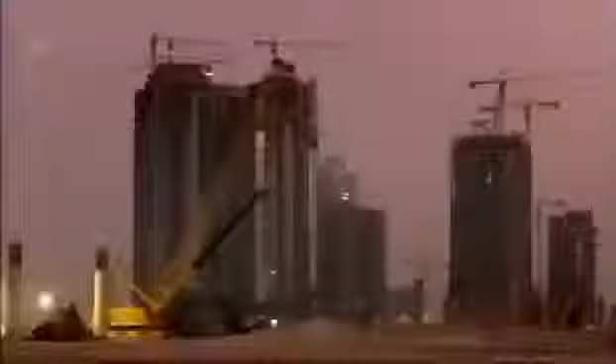Abu Dhabi, the richest city on the planet. It wants to join the City Super League and is undertaking an incredible transformation, building this extraordinary skyscraper, Aldar HQ. Nothing like it has ever been attempted. It'll be a race against the clock. Will this megastructure push even Abu Dhabi to the limit?

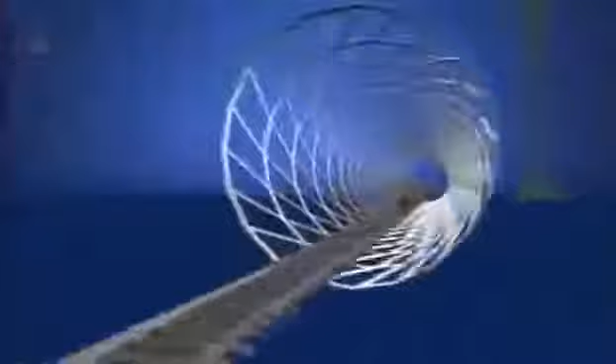Abu Dhabi is in the midst of a construction boom. It's the largest of 7 sheikdoms known as the United Arab Emirates. Its capital, also called Abu Dhabi, is the richest city on earth. Its ruler, Sheikh Khalifa, has a cool $875 billion in the bank and an audacious spending strategy to match. He wants to transform the skyline and compete with the international elite of London, New York, and Hong Kong.

But this is not the first time the Emirate has stood at the crossroads. Just decades ago, Abu Dhabi was a desert backwater, until the discovery of oil in 1958 brought unimaginable riches to its ruler, Sheikh Zayed. As the petrodollars flowed in, he converted the shell houses into high-rise, and the traditional way of life was swept away.

Today, Abu Dhabi is a thriving metropolis, sitting atop the world's 5th largest oil reserve. But black gold alone cannot put this city in the Super League. To do that, Sheikh Khalifa must lure big business and tourist dollars. Abu Dhabi must expand to thrive.

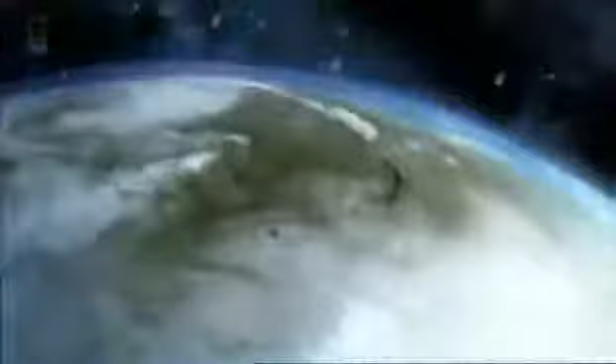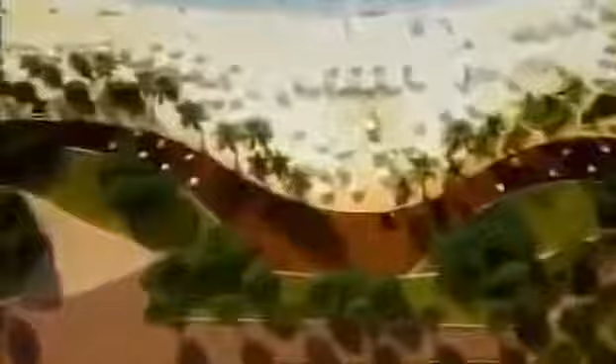To put Abu Dhabi on the world map, fledgling property developers Aldar plan a whole new micro-city, Al Raha Beach. It's an ambitious proposal. At 11 kilometers long and almost a kilometer wide, this city on the sea will be the biggest project ever attempted in Abu Dhabi's history. Mohammed Al Mubarak is in charge of delivering this audacious development. The vision of their highnesses and the vision of Aldar was to create this almost mini city where people can live, study, play, and work in one destination.

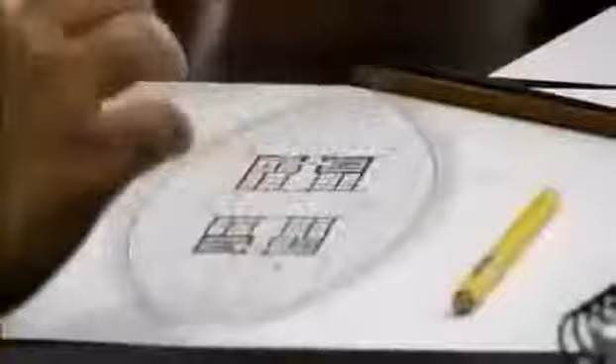Al Mubarak must attract investors if Al Raha Beach is to succeed. So to launch the project, he commissions a signature skyscraper. Creating an iconic structure on Al Raha Beach was of vast importance in basically putting Al Raha Beach on the world map. Al Mubarak sets Lebanese architect Marwan Zgheib the task of designing an icon that raises the stakes even higher. The building will become Aldar's headquarters in the heart of their colossal development.

But creating something new in a land where the iconic is the everyday won't be easy. Neighboring Emirate Dubai has taken center stage with a number of headline-hitting projects: the world's tallest skyscraper, Burj Khalifa, the Palm, and the World, and the emblematic Burj Al Arab. To stand out from the crowd, Zgheib knows he must redefine the extraordinary. Simple can be powerful sometimes, and especially in architecture. You can see it since the pyramids of Egypt. Most of the iconic buildings are very simple buildings.

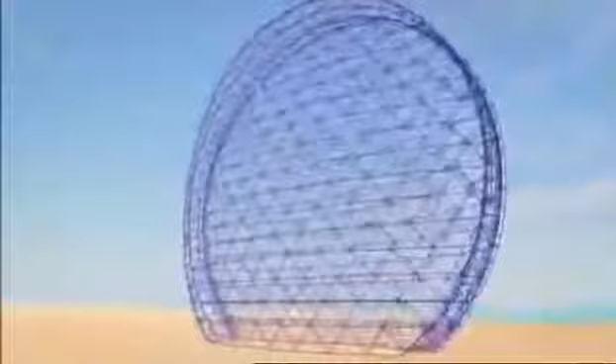But it isn't until Zgheib is relaxing on a plane that he has a brainwave. I couldn't sleep, so it was a moment of relaxation, you know. And then the idea came simply. So I took a pen and I drew it on a sketchbook. The design is simple but daring. A round skyscraper taller than the Statue of Liberty, with a curved glass skin covering the area of 4 football fields. To be honest with you, the moment I imagined it, I knew it was a winning concept. I knew it was something different.

In fact, the design is so unusual, Al Mubarak initially doesn't know how to react. When I first looked at the MZ design, I was a bit confused in the beginning, to be honest with you. I felt like I was looking at a comic. I felt that this was a flying saucer and basically it landed on Al Raha Beach. And I just kept on staring at it for like another 15 minutes. And after 15 minutes, I just fell in love with it.

Zgheib's design is inspired by nature. 2 giant circular curved walls of glass mirror an open clamshell. Architecture is nothing but imitation of nature. At the beginning, the idea was so geometrical, very pure. It's like a seashell. The seashell has deep meaning for Abu Dhabi with its seafaring heritage.

But a circular design poses a problem. Just like a coin that stands on its edge, it risks being unstable. The circle must be balanced. So Zgheib turns to some very old-school geometry. The real challenge of the circular facade was to find the 2 points where the building should pose on the ground. And for that, I had to go back to one of the oldest rules in architecture, proportion. When you have a circle, you can divide it into a pentagram.

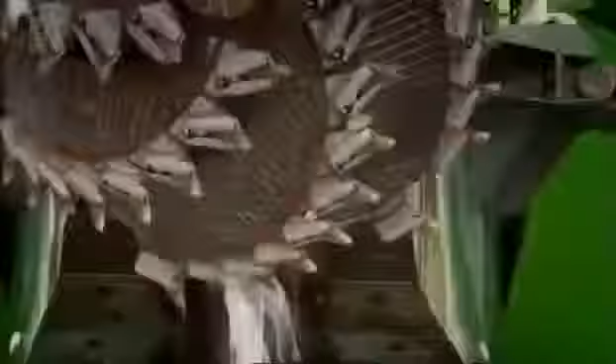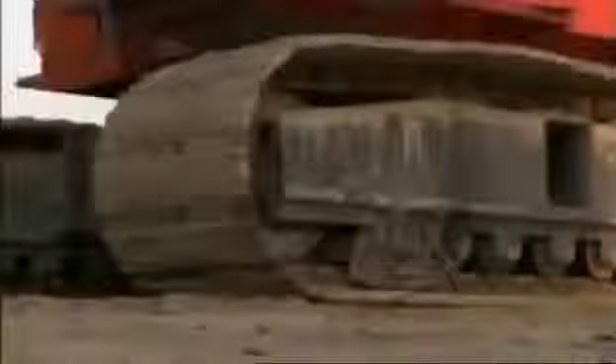A fleet of cutter dredgers eat their way into the island. These are no ordinary dredgers. It takes an enormous claw layered with 48 reinforced steel teeth to slice through the hardened sand. The sand is pumped through a floating pipe to the construction site. Here, excavators toil 24 hours a day to flatten the virgin ground. After 8 months, the land for Aldar HQ is fully formed, and with this, the first major problem overcome.

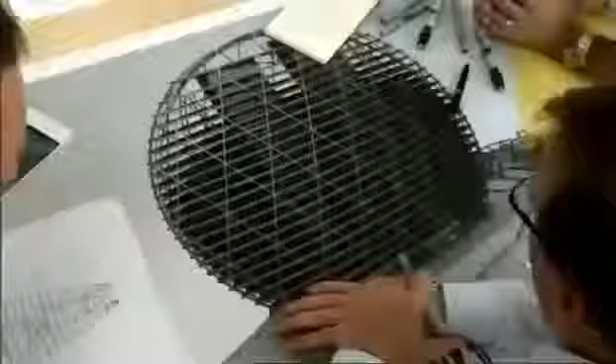Aldar want their skyscraper completed by an astonishing deadline. In just 30 months' time, the eyes of the world will be on Abu Dhabi when it hosts its first Formula One Grand Prix. The racetrack will be on its own designated island, complete with hotels and theme parks. And Aldar are building the lot. The international press and tens of thousands of visitors will descend on the city. It's the ideal opportunity for Aldar to showcase their new HQ. But to stand any chance of meeting this target, the team will have to pull out all the stops.

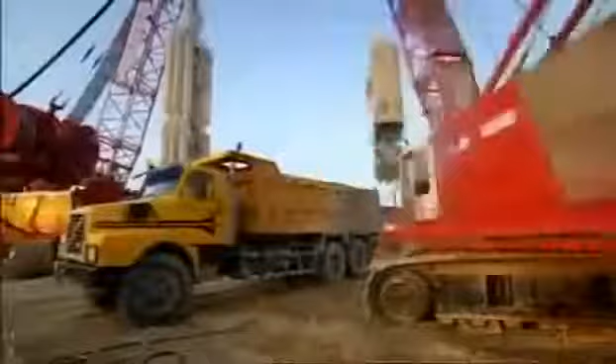Just one month after design has started on Abu Dhabi's round skyscraper, the construction team arrive on site to begin foundation works. For construction manager Miles O'Sullivan, the schedule is a shock. With the design not complete and being told you're going to pile in one month, almost crazy. But it's not just the first deadline O'Sullivan has to worry about. Aldar HQ's round curved shape presents an enormous sail-like area when wind strikes. Wind tunnel tests must be done to prove the foundations can take the strain. But the results won't be back until work has already started.

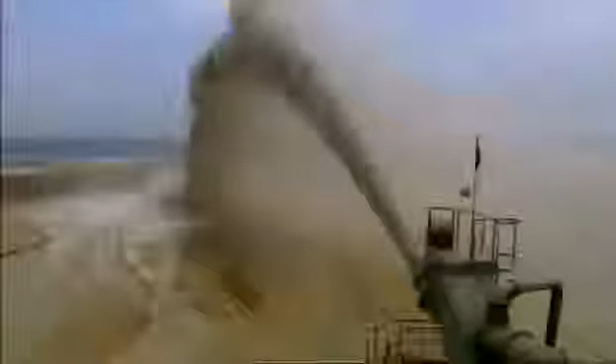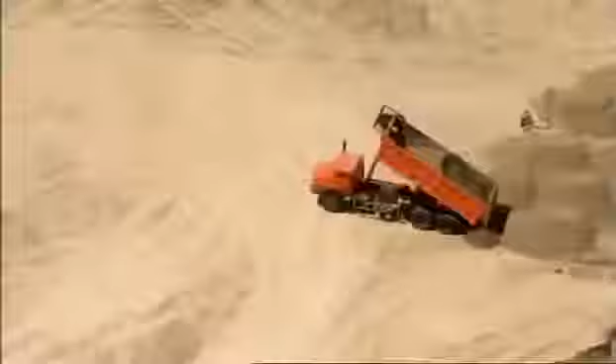Abu Dhabi is regularly hit by high-pressure winds that sweep in from the Persian Gulf. But building Aldar HQ so close to the sea will put the foundations under another kind of pressure. Digging for Aldar HQ is very similar to digging here in the sand. As you dig down, you'll get to see the groundwater starting to surge through the sand. And in fact, it's that groundwater coming through the sand here that's creating the pressure and creating the issues for us when we do the construction. The upward pressure of the water and the loose sand pose a problem for foundation construction.

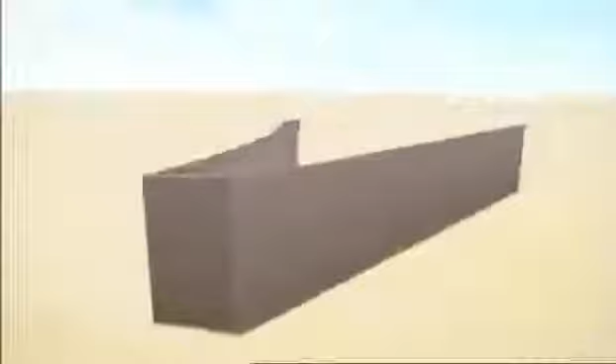Before excavation can begin, the team must build a solid barrier called a diaphragm wall or D-wall. It's a concrete barricade formed of interlocking panels which socket into the bedrock and reach 16 meters below the surface. The D-wall holds back the loose sand and the surging seawater, ensuring the ground inside the barrier can be removed. These areas here, what are these? The D-wall must be built before the foundations can be laid. But with the blueprint above ground a work in progress, the team can only hope that over-engineering the foundations will make them strong enough.

The design calls for about 400 concrete piles that work in two ways. Half of the piles rely on friction with the ground to secure the structure to the rock and sand below, whilst the remaining piles drive deeper into the rock to dissipate the building's immense loads into the ground. On site, D-wall construction begins. It's the same process ongoing at this Abu Dhabi construction site.

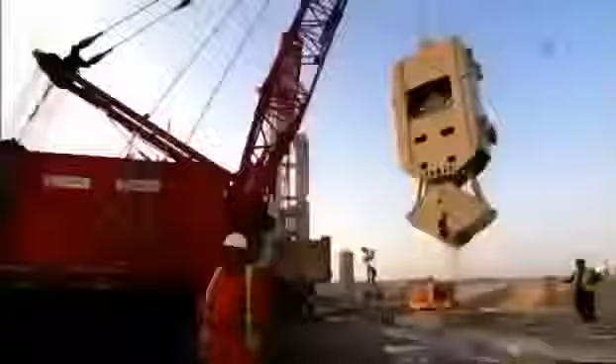Until recently, Al Raha Beach was just a vision for Aldar's Mohammed Al Mubarak, but the dream is slowly emerging from the sea. Seeing that land come up, seeing the amount of work and the amount of staff we had on the ground to make sure that was going to be done, that was like watching Rome being built.

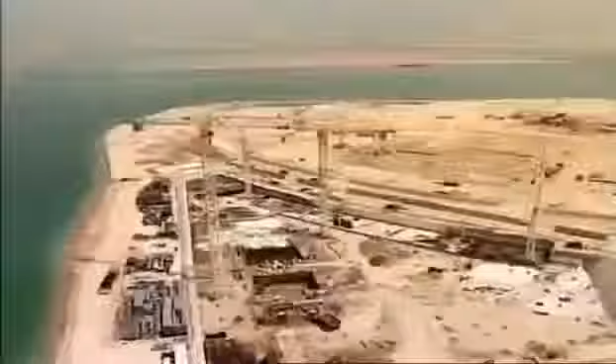The D-wall and concrete piles create a firm foundation upon which to build Aldar HQ. But the force of the sea pushing up through the sand still poses a threat to the skyscraper. A great way of demonstrating the problems we faced at Aldar HQ with the groundwater is imagining that this bottle here is Aldar HQ. And as I push the bottle down, you'll see forces are exerted on my hand. And in fact, that's the groundwater trying to push the building out, trying to push Aldar HQ out of the building site.

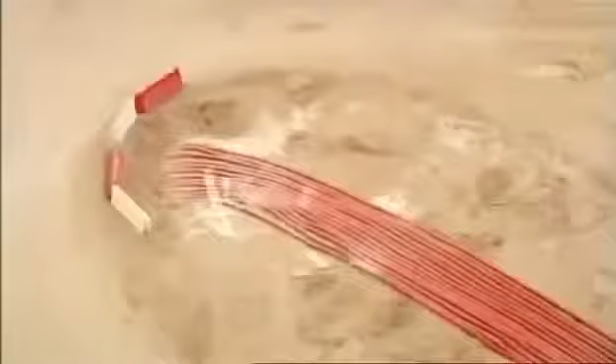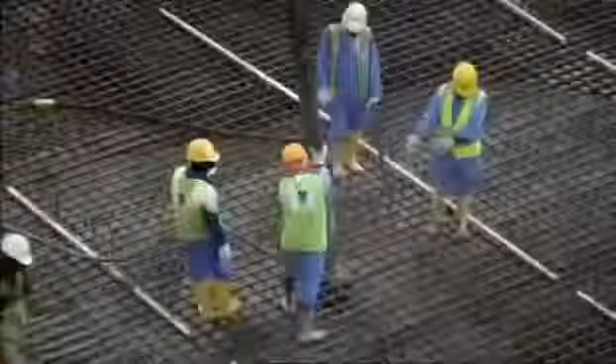To keep the site dry during construction, water is sucked out of the sand and pumped out to sea. But that's only a short-term solution. To protect this skyscraper in the long term, the team need an extra defense. It's a giant slab of concrete called a raft. It creates a barrier against surging water, stops the piles from punching up through the building, and acts like a snowshoe to evenly distribute Aldar HQ's 59,000-ton weight into the ground.

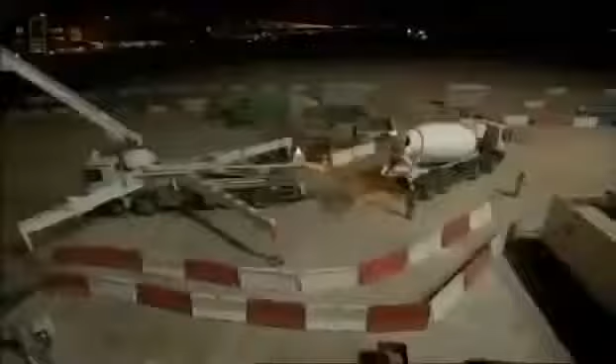Raft construction for Aldar HQ is 12,000 cubic metres of concrete, which is a 30,000-ton structure. It's a huge element. With 2,000 truckloads of concrete to pour, it's a job that continues into the night. But engineers are just getting to grips with the severe forces that will affect the piles. The unique shape of the skyscraper will capture wind like the sail of a yacht. There are no guarantees the foundations will be strong enough to cope with the loads.

The advanced construction works had to commence so quickly that we didn't have time to do the wind tunnel test. It was important that we did one, primarily because this is a unique shaped building. Gibbons calls upon wind engineer Roy Denoon in Colorado, USA. He puts a scale model of the HQ through its paces in his high-tech wind tunnel. Right at the start, Craig Gibbons actually called me and said, "We've got something really unusual coming up. Can you take a look at it and give us your first best guess of what the wind loads might be? Give us some guidance on how to get to some loads for the foundations, because this is running on such a fast-track schedule." Knowing that Gibbons is already building the foundations, Denoon wastes no time in firing up the fans.

If the tests reveal the wind loads are higher than predicted, the foundations already in the ground may have to be redesigned. To be putting in the foundations before we could finish the wind tunnel testing, that always gives us a little bit of cause for concern. Denoon is right to be worried. He knows how high-altitude wind impacts on very tall rectangular skyscrapers. But Aldar HQ's lower height means another type of wind is the threat. When we look at the really extreme wind speeds in the Middle East and in this region, we find that the highest, what we call gust wind speeds, the short events, are caused by thunderstorms.

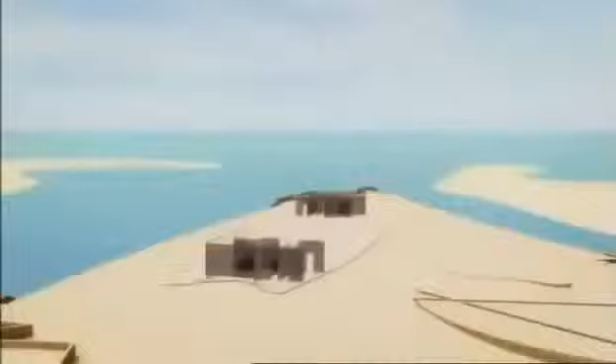Aldar HQ needs two concrete cores for extra stability. The twin spines rise a full 125 meters from the concrete slab to level 23. Reinforced with 6,500 tons of steel, these cores will transfer the loads into the piles. But to channel these forces safely, the concrete must be cast without any flaws.

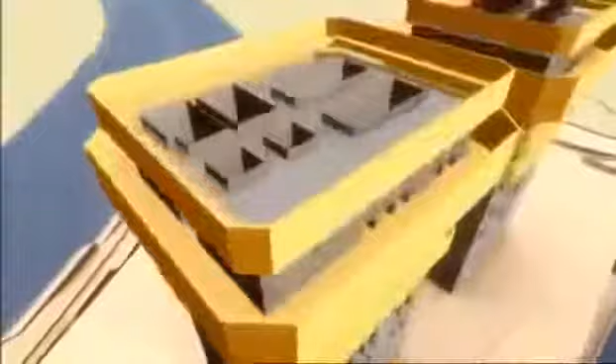They need a way to build the cores as two single pieces of concrete. The answer? To slip form. It's a clever way to build big concrete towers. Liquid concrete is poured into a giant mold, which forms the shape of the structure. The mold slowly climbs up the core as it's cast, forming a single concrete tower without any joins.

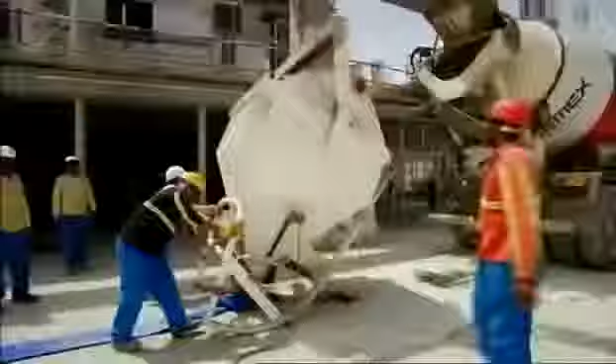Seamless concrete will ensure the HQ's cores are strong. But these 125-meter backbones must be built in only 6 months. It's the same process ongoing at this Dubai construction site, led by the Aldar HQ team. We are calculating how much per hour we need to climb, and then how much concrete we need to place in every hour. Slip form is fast, but on this schedule it's not fast enough.

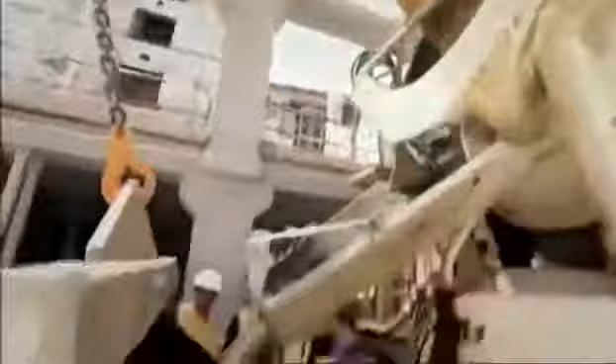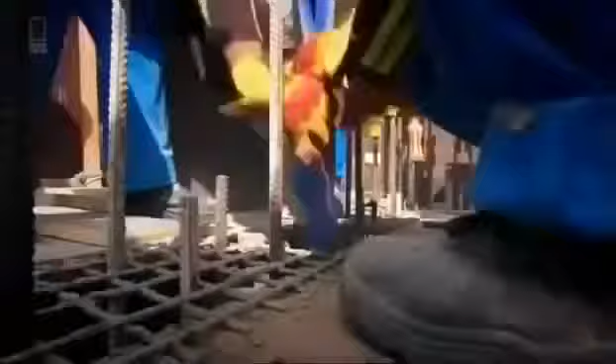O'Sullivan has a trick up his sleeve to speed up construction. We set a challenge to both cores, who could get up there first. More. Get up. The teams battle to reach each level before the other. The cores grow meter by meter under a constant cycle. The concrete is released and poured around the steel reinforcement. Hydraulics anchored to the structure raise the mold or shutter so that the next layer of concrete can be poured.

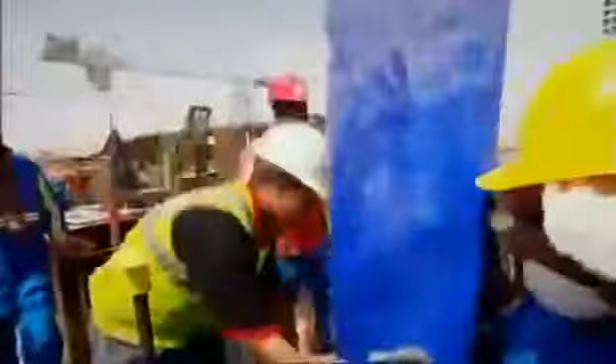Manpower is a key focus because slip forms are very labour intensive. You need to make sure that the guys are on deck, they're there at the right time, they're doing the right works. 4 months into core construction, the two teams are neck and neck in the race to the top.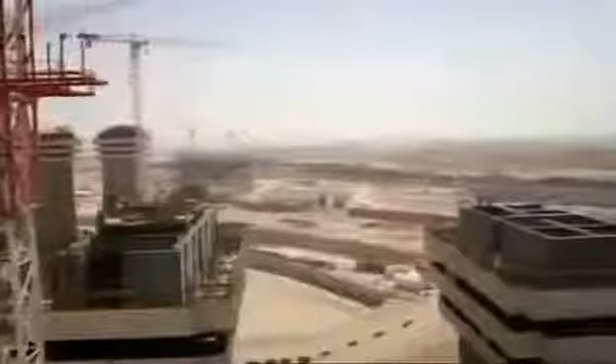Core 1's team leader keeps a close eye on Core 2's height. It's been my benchmark, so if I'm doing better, I'll be ahead of them. A lot of pressures are there. My boss is telling me, do this, go up, go up, go up. But it's good, the pressure is good. Core 2's leader also feels the strain. I'm working 24 hours today. I try to finish earlier than the other core.

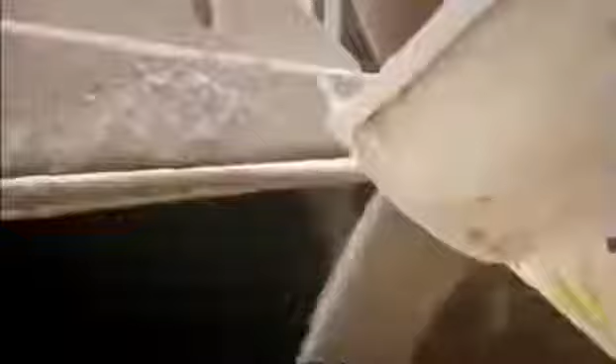Every month, the builders pour enough concrete to fill 1.5 Olympic swimming pools. But the teams aren't home and dry yet. There's still a challenge to finishing. Cores are renowned for going up quickly and sometimes having problems, so there's a lot of coordination effort that goes in to make sure that they do go up on time. We had structural steel elements to cast in. We had crane connections to get right.

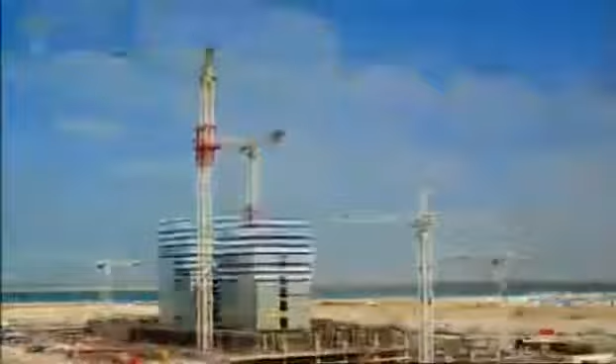After just 6 months, the two cores are approaching the top. Core 2 is only a meter or so behind, but Core 1 push ahead to victory. Core 1 won the race. It's really good to know that we're on top. For O'Sullivan, the contest to build the cores in record time has paid off. A lot of planning goes into the cores. To see it come off, a fantastic feeling. But it's only a stepping stone, the core construction. There's a lot more to go on.

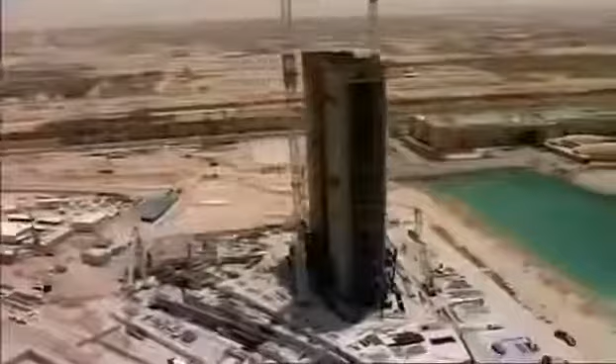The team have so far overcome the obstacles to bring Aldar HQ to life. But now they must face their most complex challenge to date. 1 year in, and Abu Dhabi's radical skyscraper is beginning to take shape. But with only 19 months to the deadline, the engineers must crack how to build Aldar HQ's vast external shell.

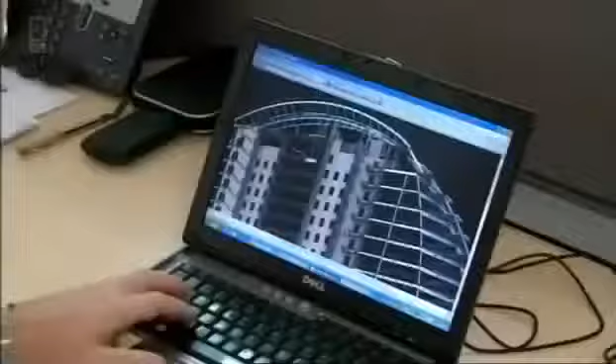The design demands a heavyweight shell to support its wide girth and survive huge wind loads. But the architect stipulates open office space, floor-to-ceiling windows, and panoramic views of the Persian Gulf. In the United Arab Emirates, the shells of rectangular skyscrapers are built with concrete. But the geometry of Aldar HQ's shell is so complex, it must be built with the precision of a Swiss watch to fit together. On this scale, achieving millimeter accuracy with concrete is practically impossible.

We knew at the outset a wholly concrete building was never going to work in this instance. And Stuart, I understand that now we've been able to get a high degree of repetition through. And there we go. The engineers need another solution.

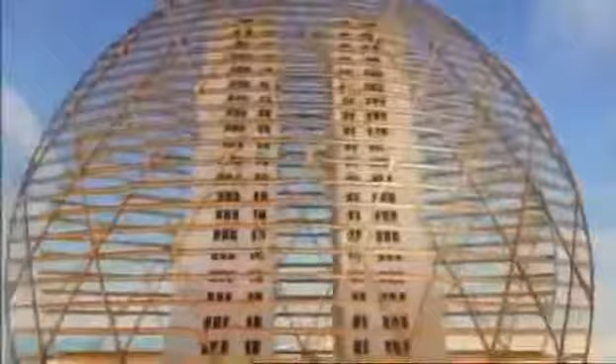The answer? A specialized steel exoskeleton called a diagrid. It's a muscular but slender steel frame that will form the HQ's unique shape and will channel forces through its high-strength beams and joints into the cores. Steel is very strong as a single element, but meshing them all together gives us this added strength and also allows us to make these rather unusual shapes.

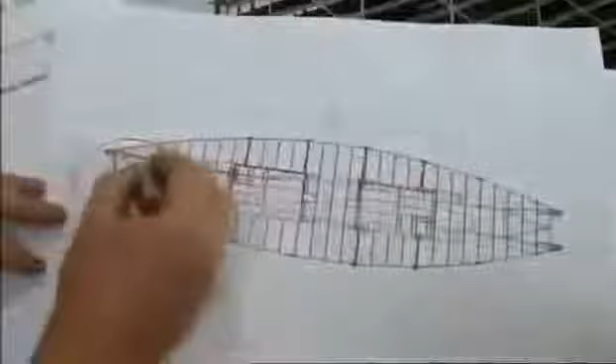The steel exoskeleton should make the architect's vision possible, but it'll be a first for the United Arab Emirates. Constructing a skyscraper like this will be a step into the unknown. The geometry of the building presented a significant challenge to us, but the other challenge was that a diagrid building, or buildings using this diagrid system, had never been built before in Abu Dhabi and the UAE. Let's have a look at it if you don't mind.

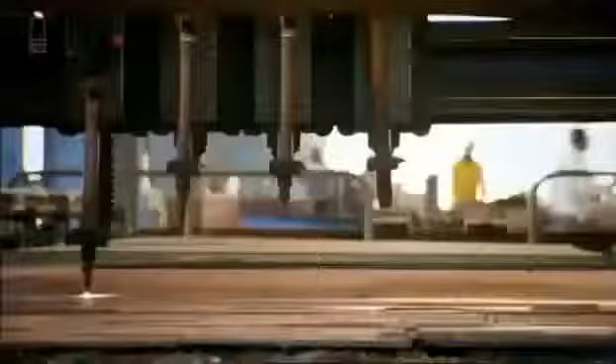It'll take expert steel fabricators to pull this job off. When we first saw the design, it was something that we knew we had to put our most experienced guys on. The structure's very, very complex. The army of fabricators work in shifts around the clock to cut and weld 2,500 tons of steel. The factory is building a series of A-shaped steel sections, weighing up to 30 tons each. They will connect together to form the structure's signature curves.

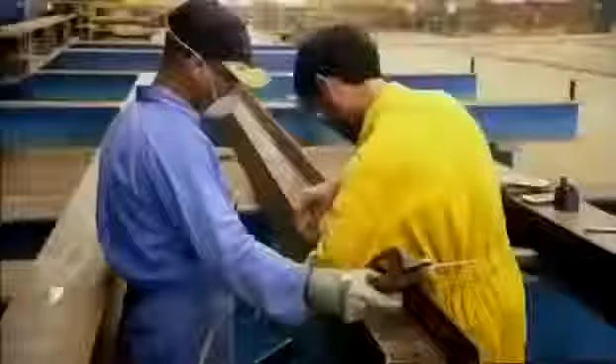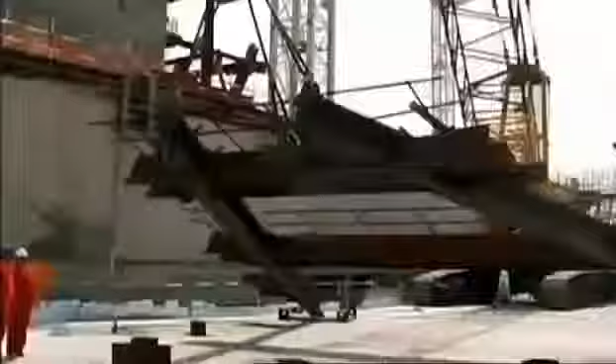But if manufacturing these giant A-frames is not a big enough job, lifting them into position on site will be a major challenge. Great to see the steel arrive for the main diagrids, the main columns to the structure. Huge sections. The thought of actually starting the steelwork some 18 months after we started the job, fantastic. But excitement of the first A-frame delivery is soon replaced with trepidation. Lifting these monsters will be a precision job, and tensions run high.

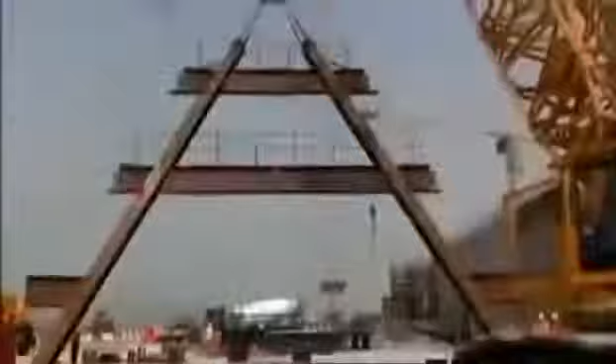When we rigged the first A-frame up, you've got to put all the chains on it. It would take maybe an hour to rig it up, and everybody's then thinking, I hope this is going to work. Everyone is on tenterhooks. Now is the moment of truth. The A-frame is lifted off the ground. There was a big ah from the crowd when it went in. The first exoskeleton section is finally bolted to the base plate. To see one go in, an amazing feeling. First A-frame up, again a milestone achieved, but then a lot more to go.

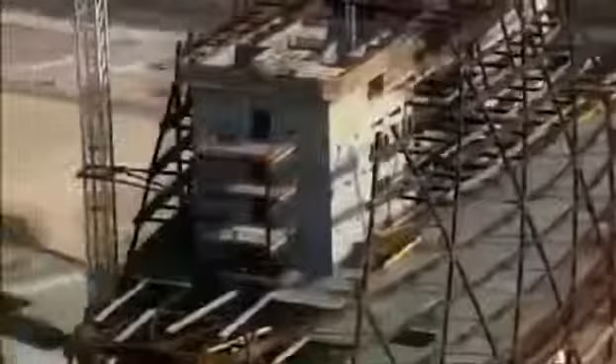Another 99 A-frames must be fitted to form Abu Dhabi's unique skyscraper. The handover date is now just 19 months away. So the team must now focus on the HQ's interior. The structure needs an alarming number of restrooms, 85 in total. This is no weekend DIY job. It'd take an army of plumbers and time the schedule cannot spare. So to fast-track the task, the team innovate again with prefabricated washroom modules, or pods.

A pod is a factory-made restroom, complete with lavatories, basins and mirrors, ready to plug into the building. The team plan to lift these 12-ton pods by crane and lower them into the cores like a giant game of Tetris. Construction is a finely tuned sequence. The pods have to be in before the exoskeleton blocks access to the cores.

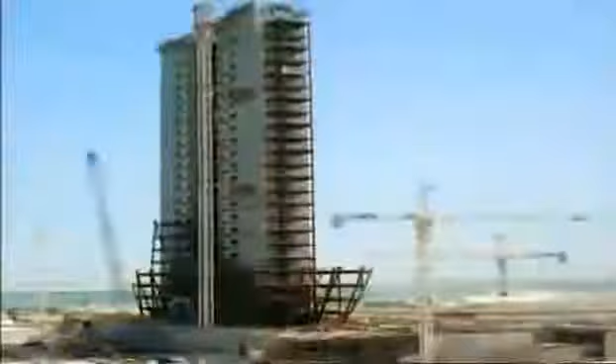Aldar must approve the design fast, but there's a problem. We produced a lot of visuals and graphics which we had signed off. Then we actually built the pod. We went to look at it at the factory and a lot of people thought that's it. But Aldar unexpectedly rejects the pod design. It's just too ordinary for such a futuristic skyscraper. It will take months to remodel, and the exoskeleton can't wait. The whole plan could go down the pan. The only option is to leave out 2 roof sections and drop in the pods later, but this has its own dangers.

With zero hour looming, the team must now wrap the building's skeleton with a glass skin. And no one has ever built a glass facade like it. The geometry of Aldar HQ is highly complex. 2 giant bowed facades cover an area the size of 52 basketball courts. A third narrow surface joins the round facades like a zipper, arcing an extreme 290 degrees from one side to the other. But curved glass like this doesn't exist. The engineers need another plan.

The secret to covering a curved surface with flat glass is its shape. Square glass isn't an option. Squares can only bend in one direction at a time without distorting. Aldar HQ needs triangles. They can pivot on 3 axes and seamlessly join with their neighbors. To form these complex curves, it'll take 25,000 individual panes.

But before glass production can begin, the team must know what wind pressures it will face. It's back to wind engineer Roy Denoon, who must test the design in his wind tunnel. When we first saw the design, we knew there was some potential for some quite high glass design pressures. If you under-design a pane of glass, then it will be sucked out the building. The large facades are most likely to cause trouble.

The biggest loads on the overall building are the winds coming flat into the wide face, so it's capturing it almost like a sail. The wind comes into the centre and spreads out around the building, and where it separates and splits away from the building around the edges, that's where we see the largest pressures. The pressure is like a big SUV hanging off the outside of each panel.

But that's not all Denoon's test reveals. The circular shape of Aldar HQ creates another problem. When we initially saw the design, the sharp edges threw up this warning flag that said, look, we can get some pretty large pressures here. Where the wind hits the edge of the narrow strip of glass, it spirals in on itself, creating a vortex.

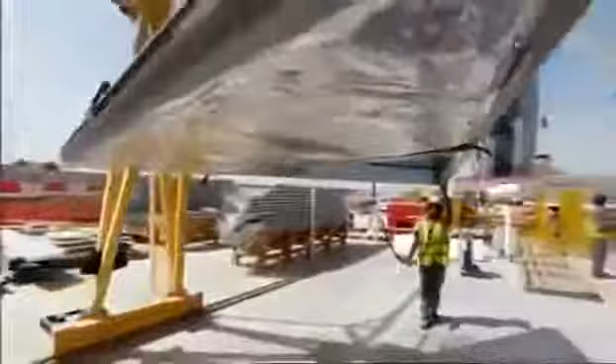But that does nothing to limit the scale of the job ahead: installation. You talk about 25,000 pieces of glass to do that for the building in 10 months. It's a monumental effort. It's a constant battle, making sure that you get the glass to site. But having the glass factory on site is a lifesaver. It made it easier for the site to actually call up on glass. Once they are installing the panel, they ran out of glass, we're immediately on the phone, hey, we need more panels over there. So we got them on a truck, and 5–10 minutes later they were on the site.

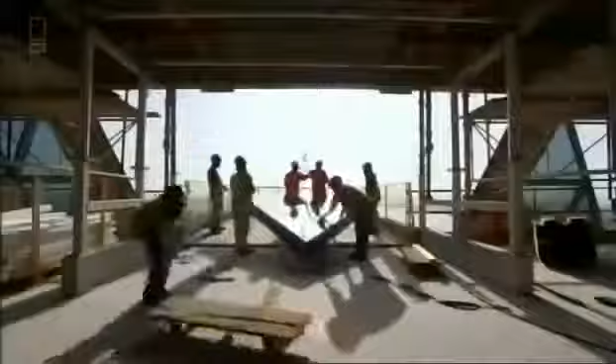The glass factory sends the panels to the site by truck, and the panels are lifted by crane up to the installation team. The constant pressure was the program. The glass is pulled onto the floor plate, but it takes a team of 8 specialist riggers to install the panels. Probably the hardest thing was the sheer volume that had to be installed. Fixing glass on a curve at this height means the panels have to be swung out from a platform that hangs out of the building.

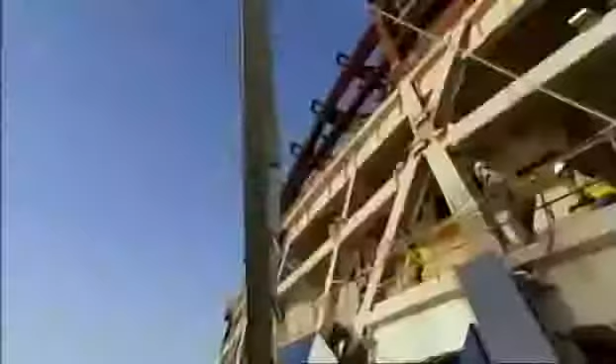It should be easy, but then this team have Abu Dhabi's wind to contend with. The wind here can just blow in from nowhere. It caused us no end of problems. The glass would start to revolve and spin. We would get a choice whether to lift it, bring it into the building, put it down, or to put it straight back down on the ground. They were decisions that had to be made on the spot. And you don't want a large panel coming down from 20 stories. Just contemplating that, it doesn't bear thinking about.

This glass panel makes it into position in one piece. But the team have another 29 to install every day if they're to meet their targets. We got it up to 30, 32 on average, and I think the best day was over 40. But as the line of glass fast approaches the top, the team must install the delayed washroom pods to close up the roof steel. You do 15 metres in one day, so you're 120 metres, yes.

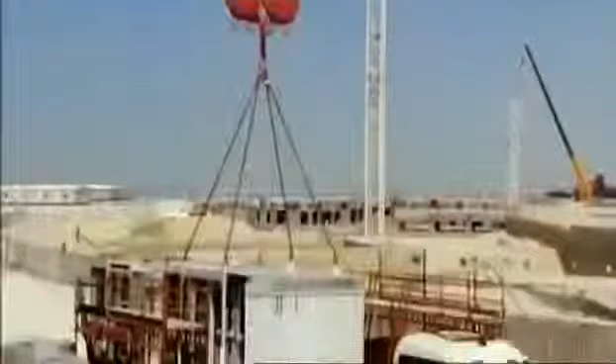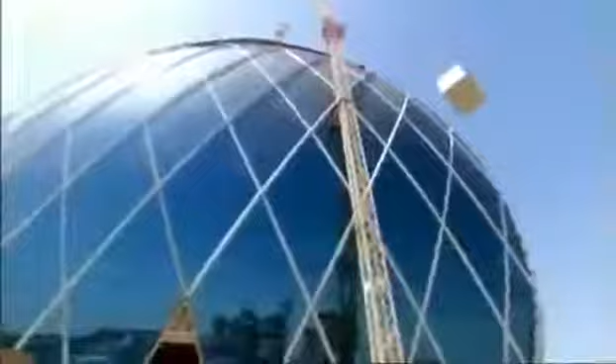The new design is finally approved, and after 10 months, the 12-ton modules start to turn up on site. The pod drops are quite quick. We hook them up, we take them up the 140 metres to the top of the tower crane. The pod can now be lowered into the core shaft. It's a tight fit with just 75 millimetres of clearance.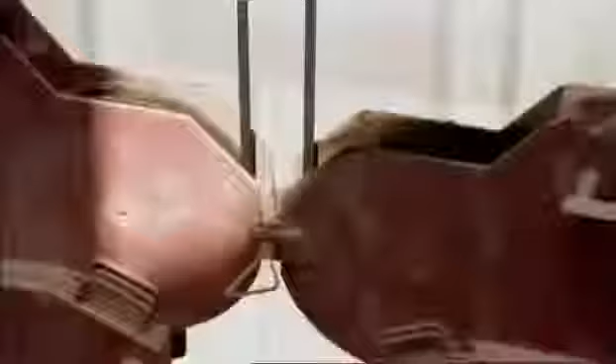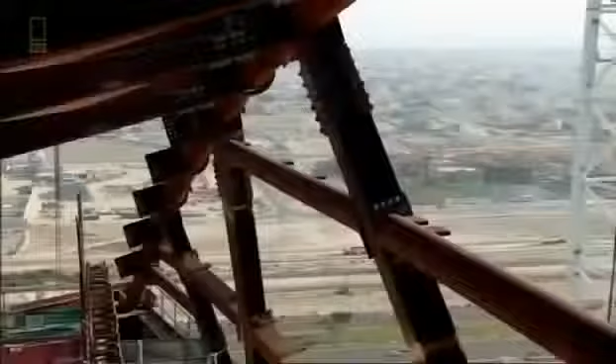When I saw the first pods in, it was a relief that that saga was over and we'd actually managed to achieve what the client wants. The pods are on the move, but the long delay has serious consequences. Finishing the exoskeleton should be a straightforward task. But the incomplete steel roof has sagged out of shape.

Eight months from the deadline, and the world's first spherical skyscraper is fast approaching completion. But with the end in sight, construction hits a serious snag. The delay in fitting the washrooms into the cores has forced the team to leave the roof arch open, causing the steel to slouch out of shape.

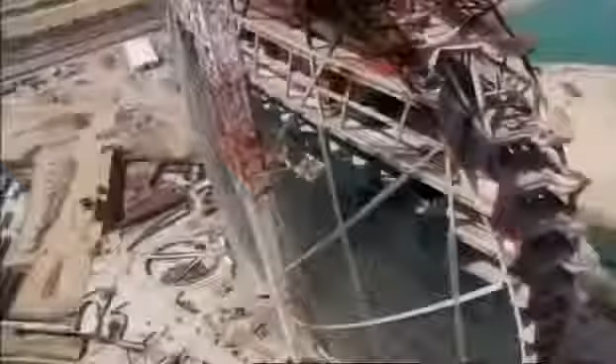The arch of the HQ's lightweight roof is the key to its strength. Its curves evenly distribute the forces down into the foundations. But if any elements of the arch are missing, the forces cannot flow away. The roof will sag under the weight. To discover how serious the slump is, the steel is surveyed.

I've made a phone call to our site supervisor, Bob, and asked the question of what the actual sag was recorded, expecting it to be around about 50–60 mil. When we got the figures of 150 millimetres, I was a little bit shocked. With a building that relies on precision engineering, a 150mm sag is a huge problem. The roof will not slot together. The brackets to connect the remaining 40 glass panels will be out of alignment.

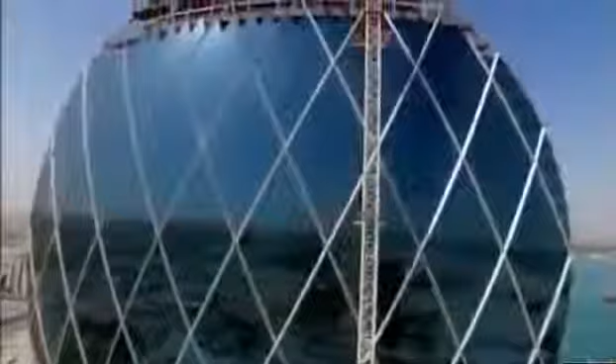There is no time to redesign. The team have to somehow make the roof steel fit together. The only way is to lift the entire roof into position, and it weighs a staggering 200 tons. Even for experienced steel engineer Bob McPhee, this is a serious undertaking. I hate it when you start waking up thinking about your work. I've never liked to do that.

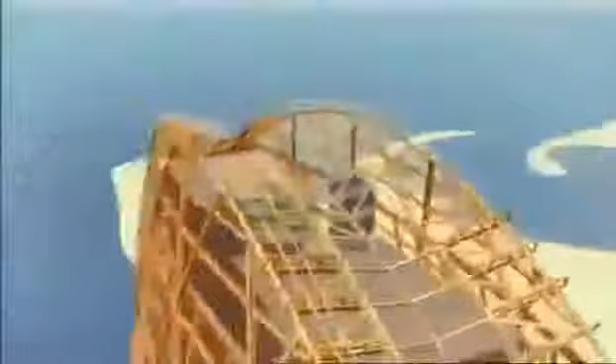To lift the roof arch, 2 hydraulic jacks are positioned on top of a load-bearing wall, carrying 80 tons of weight into the core. 2 more jacks are propped with 16-meter-tall steel columns and channel 40 tons each into the concrete floor of level 23. The props are packed with steel slabs to hold the roof in position as the jacks are raised.

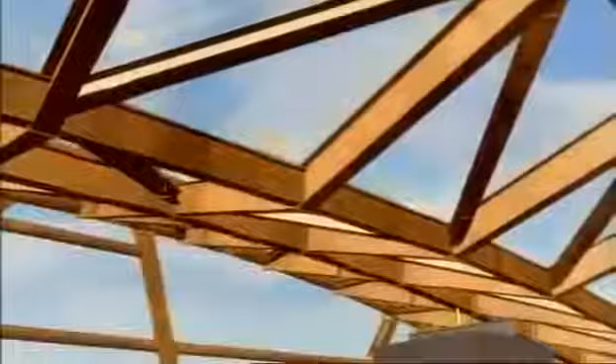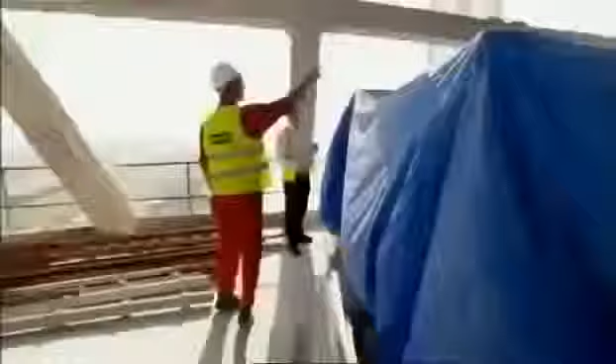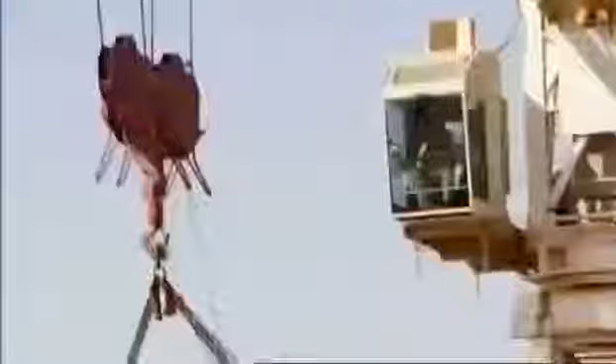The roof is moving firstly a couple of millimeters, then 5, then 10, then gradually into its position 20, 50, 100, and then into its final position 150 millimeters. The entire roof is raised by a whopping 150 millimeters. The slumped arch is finally in the right position. All that remains is to lift the last steel section. It's a tight fit. With a millimeter to spare, the roof is finally complete.

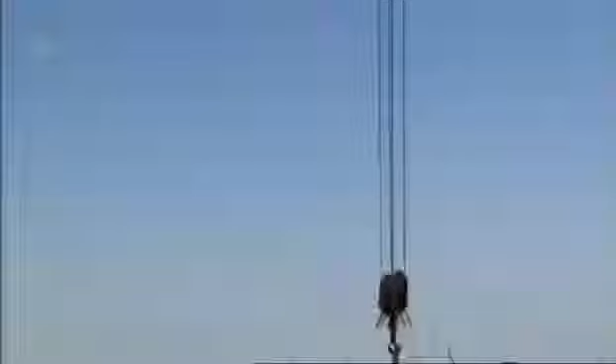With just weeks to spare before Abu Dhabi's first Formula One motor racing spectacle hits town, all of Aldar HQ's 25,000 glass triangles are in position, except one. The glass installation team lower the pane inch by inch. No one wants to be responsible for shattering the last sheet of glass. It's a defining moment for the team. Finally, the last pane slots into place.

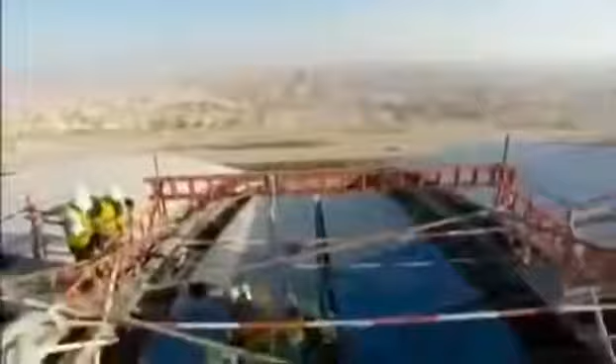Ecstatic. Actually see the last bit of glass go in. Amazing feeling. Hopefully the guys here feel the same way, and I'm just overjoyed. Against all the odds, and in just 30 months, the team have fulfilled their brief. An engineering triumph. This is Aldar HQ. This spherical skyscraper, a world first, rises 110 meters above the Abu Dhabi sands. All 25,000 glass panels mirror the surrounding landscape, reflecting the blue skies and the rolling sea of the Persian Gulf.

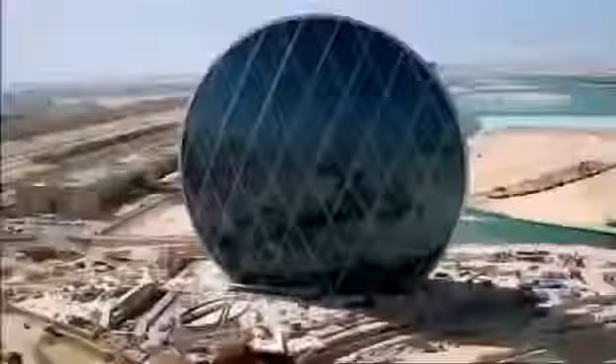Amazing structure. You don't see any circles in the world being constructed, so to be part of that was fantastic. Mindful of all the issues and challenges and highs and lows in between adds to that feeling of triumph. Mohammed Al-Mubarak fell in love with an extraordinary idea. But will the building match his high expectations?

It is really a work of art. It's a stunning building. To me, it feels like it should be in a museum. The space is unbelievable. It's really a colossal building. When you come up front to it, it's even bigger than you even imagined. And for it to come from paper to that, it's great.

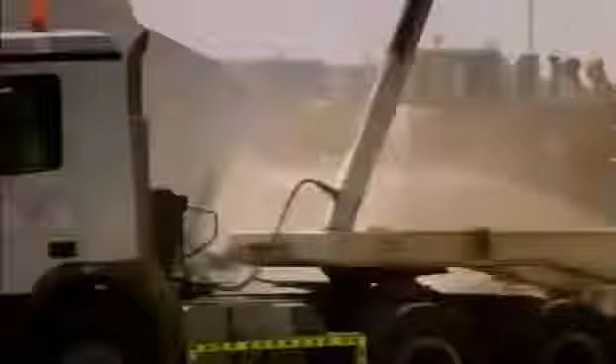Already an icon on the Abu Dhabi skyline, Aldar HQ should lay solid foundations for the future of Al Raha Beach. Architect Marwan Zgheib is delighted to see his concept sketch come to life. The building is more beautiful than the original idea because it's real now. It's no longer a simple concept.

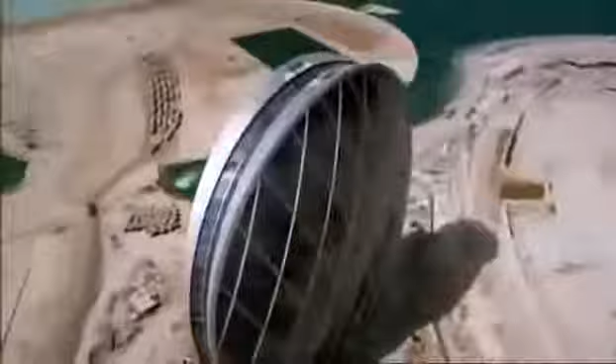It's become reality. Aldar HQ is a structure that rivals not just Dubai's iconic buildings, but can stand proud on the international stage. The HQ building has really put Abu Dhabi on the world map. If you ask me today, we're not yet into the world of Singapore or New York or Paris or London. Will we get there? I absolutely believe we will.